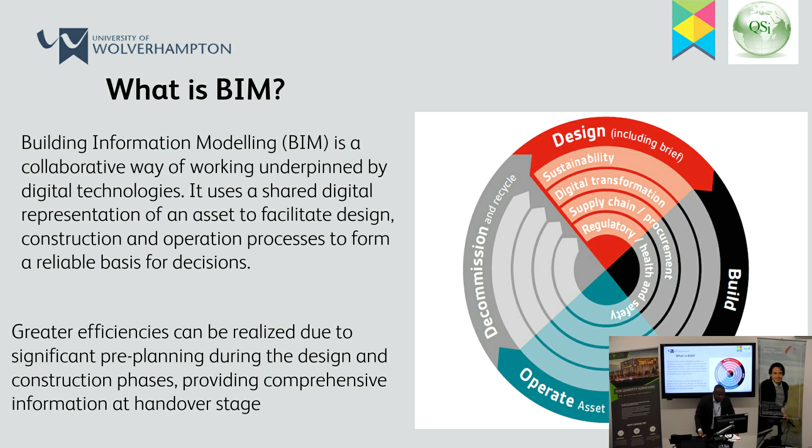So there are standards in BIM as well. A lot of people think BIM is technology. You ask people, oh, we're doing BIM, what are you doing? We're designing in 3D. And they think that is BIM. That is completely different from BIM.

What makes Building Information Modeling what it is, is that it provides a platform where standards, protocols, and processes could be utilized. That's the key thing that informs BIM, while the technological tools are enablers. Software is used to design, to monitor and control projects, to enhance productivity on site during construction. They're all enablers, but the key thing that underpins BIM is the processes, and the core of those processes is the standards.

So if we look at the standards now, pre-2010 there is BS 1192, a standard which deals with collaboration amongst the AEC professions - that is architecture, engineering, and construction. So pre-2010, there is BS 1192:2007 that was there to enhance that collaboration.

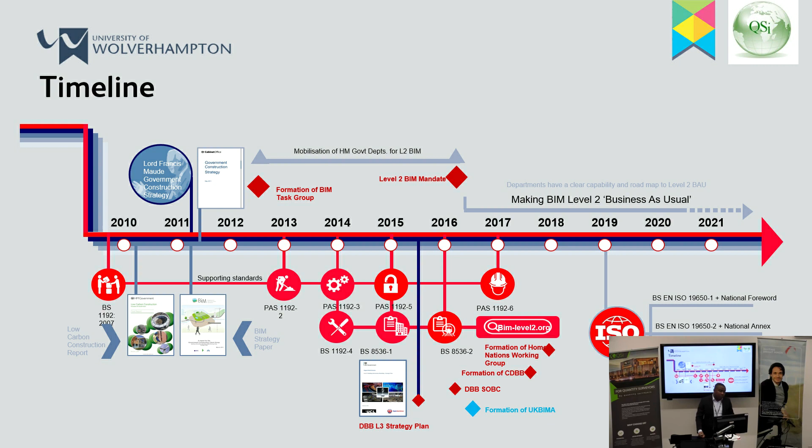So these standards are the underpinning elements that govern the implementation of BIM, or that enhance outputs of different phases in construction projects or other projects as applicable.

This part 1 of ISO 19650 is the national foreword. Part 2 is the standard plus the national foreword - it's an extension of PAS 1192 part 2 into ISO, which also has a national annex. And 19650 part 0 is the guide to BS ISO 19650.

So these are the standards that they use at the moment, not just in the UK - it also extends to other countries. Because of that, some UK-centric terminologies have been updated to accommodate other users in other countries around the globe.

Things like Employer's Information Requirement, which is called EIR - we're going to talk about it a little later - is now called Exchange Information Requirement. Contracts are changed to appointments. So there are different terminologies, different changes to accommodate users in other countries.

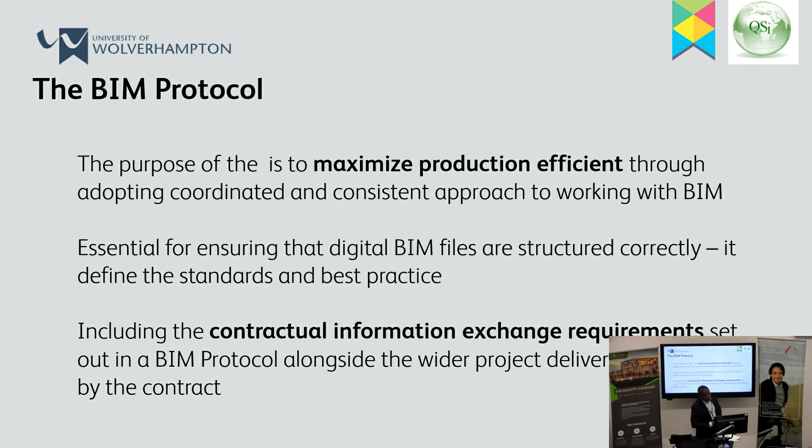Okay, so BIM protocol also supports - if you look at a typical BIM protocol document, you find things like details of BIM information manager and BIM coordinator. You find sections dealing with common data environment, sections dealing with BIM execution plans, sections dealing with levels of model details, that is, level of details as designs progress.

Things like project information model (PIM), and asset information model, model production and delivery table (MPDT). You find all those within the protocol document, and this protocol document is actually very supportive to helping in developing information around BIM implementation, developing information that will support the design and construction, operation and management of that asset, and also ensure that collaboration works very seamless amongst multidisciplinary project parties, if you like.

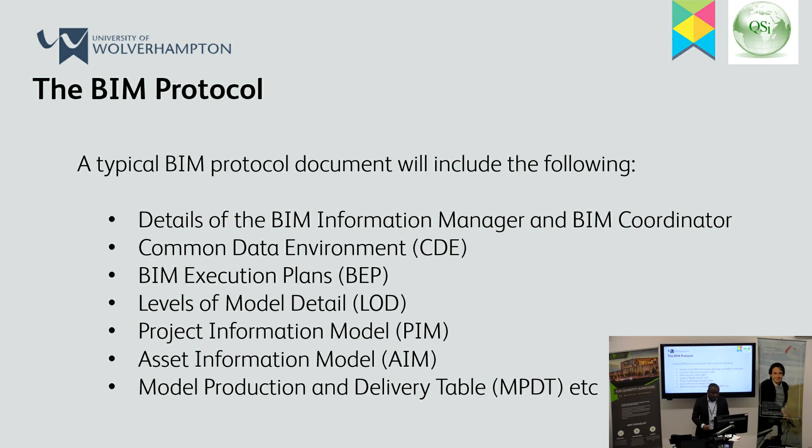So there are guiding principles as well of BIM. You may want to know that BIM is about enhancement or improvement of information management, basically. So it's centric around data management of construction information, right?

So the guiding principles, of course, when you want to deal with BIM, is talking about people, processes, and technology. You have people who understand the processes, and they also implement the technology, which are the enabling tools that's being used.

And this guiding principle deals with how information should be designed, how construction should be built, and how it should be operated to realize the best value, or the best benefit that could come out of a construction process or project, or benefits that could come from this new way of working.

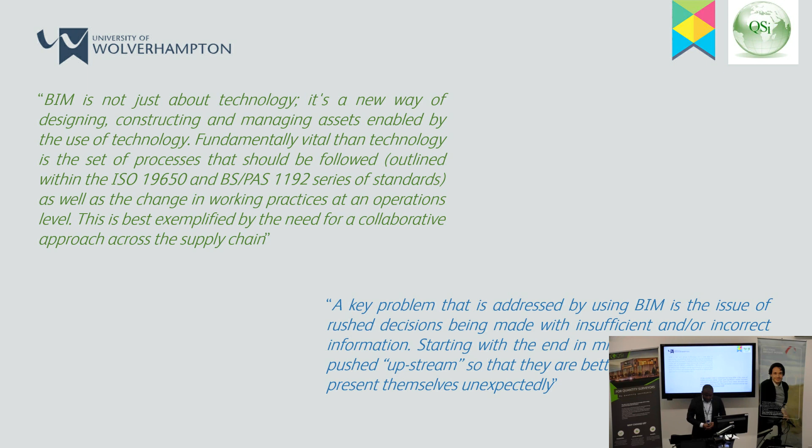So then going over to BIM terminology. We've looked at what the BIM definition is, we've looked at the standards that are there, we've looked at the guiding principles. So let's look at, like I said, I'm just providing a basic overview, knowledge and understanding of what BIM is all about.

And before I forget, there are also levels in BIM where you have level 0, level 1, level 2, and then level 3. Level 0 is just the normal traditional process where things are being designed using drafting skills and hand drawings, majorly drawings, and then cost information is extracted using scale rules, the traditional process of measurement, and the plan of that project or the program that will deliver that project is also done very traditionally.

And then you come to, there's no standard anywhere there, and then you come to level 1 where you have some elements of 2D design and some 3D CAD design as well, to show the geometry or the graphical information of a particular project.

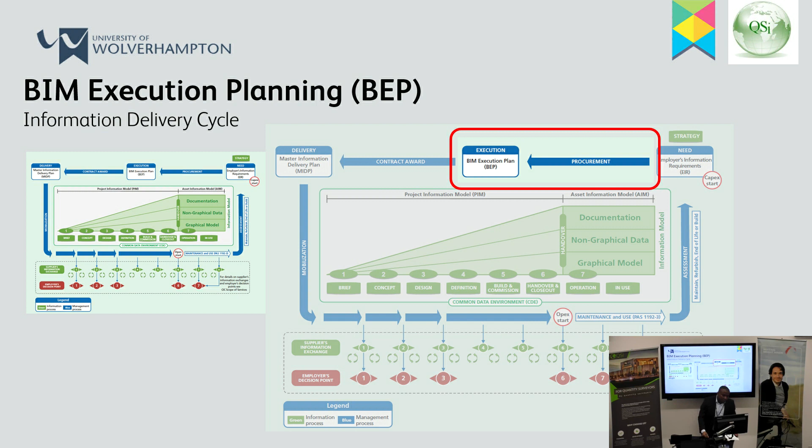Part of the tender documents given to them is the employer's information requirement, and based on that they respond, again depending on the procurement and contractual arrangements agreed. They then respond with the BIM execution plan. After they've evaluated all the tenders, based on the competencies required, considering this is a BIM project, they can decide who to award that contract to. From there, the contractor will begin to produce other documentations like master information delivery plan and task information delivery plan, and so on.

So the purpose of BEP is to facilitate the management of information on the project, including the contractual information exchange requirements set out in the BIM protocol, alongside the wider project deliverables as established by the contract.

BEP, like I mentioned, is prepared by the suppliers who will supply those services and products to the client, and it explains how the information modeling aspect of a project will be carried out. BIM execution plan acts as a digital method statement - just like on a traditional project they always submit a method statement, so BEP acts as a digital method statement setting out the supply chain's agreed approach to BIM implementation on that project.

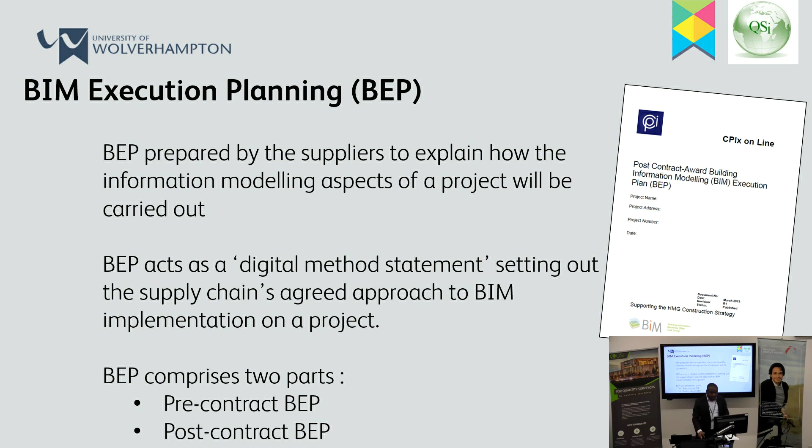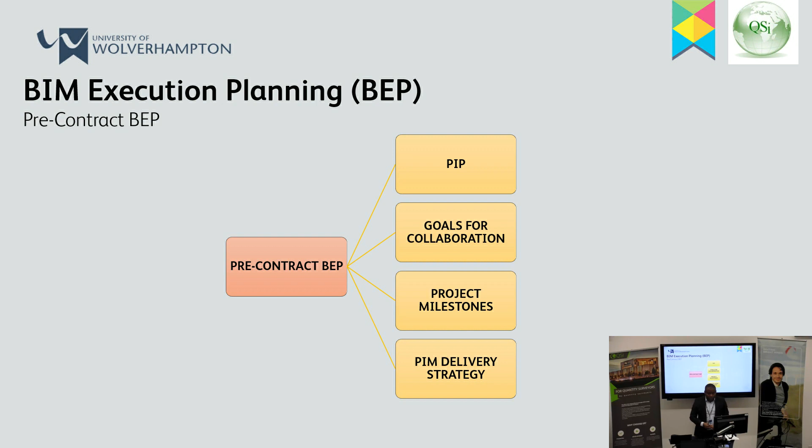There are pre-contract BEP and post-contract BEP. Pre-contract covers project implementation plan, goals for collaboration, project milestones, and project information model delivery strategies. Post-contract BEP deals with management aspects, planning and documentation, standard methods, IT solutions, and all the delivery plans in terms of specific tasks.

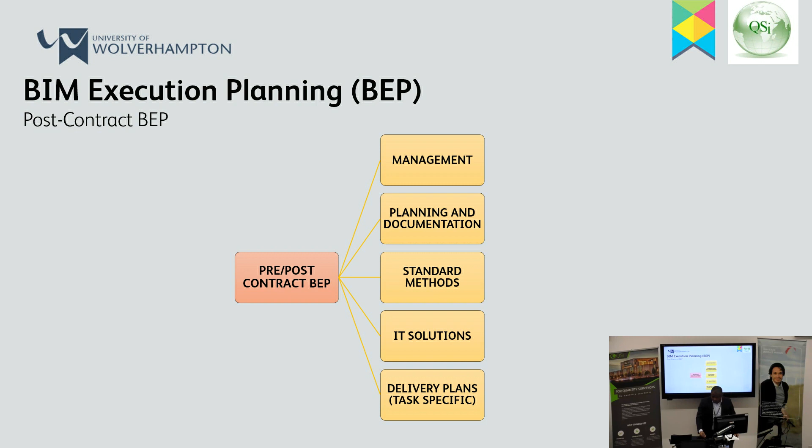Another terminology you find in BIM besides EIR, OIR, AIR would be common data environment. This is very key to collaboration. It's a single source of information for any project that is used to collect, share, manage, and disseminate information, and that information which is shared or disseminated must be approved files.

That information could then be shared amongst a multidisciplinary project team. CDE may use a project server, an extranet, a file-based retrieval system, or other suitable tool sets. Most commonly, they use a project server or a cloud-based system where they dump information - for example, BIM Extra is a common data environment in terms of the software tool, and 4Projects is also a common data tool. In most cases they dump information in the cloud, and every key member of the project team who requires access would always have their login details to that platform to integrate and produce information.

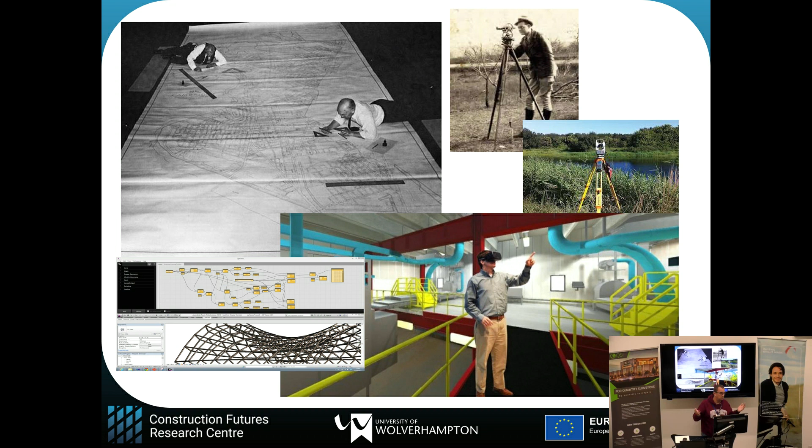So we're going to look at some of these. I wanted to run through some of the things that are happening now, some of the things that are starting to evolve, and some of the things that we're engaged in using. And the first one that kind of excites us around this BIM, in inverted commas, workspace - that's the onset of artificial intelligence and where we're going with that.

And we engage with artificial intelligence every day, we just don't know we are. So when you go onto a website and there's a chat bot, that's not human, that's an AI sitting in the background, and that AI is looking for keywords and then it responds to you. That's one. You know, when we go onto our banking websites and it asks you to select everything with a traffic light in it, you're training Google's AI, ready for driverless cars. That's what we're doing. So we're taking that on as well.

And the subset for us around this is GD, generative design. Massive for us as a construction industry, the applications off the charts for us going forwards. Because what that algorithmically allows us to do is give parameters to a design package and tell it to optimize it, come up with hundreds of ideas. We do it with our architecture students.

Our architecture students could spend hours and hours with bubble diagrams, saying well we want this space to be related to this, and what's the best approach for doing it. Hours and hours. Give those parameters to the machine, it'll generate hundreds of options for us.

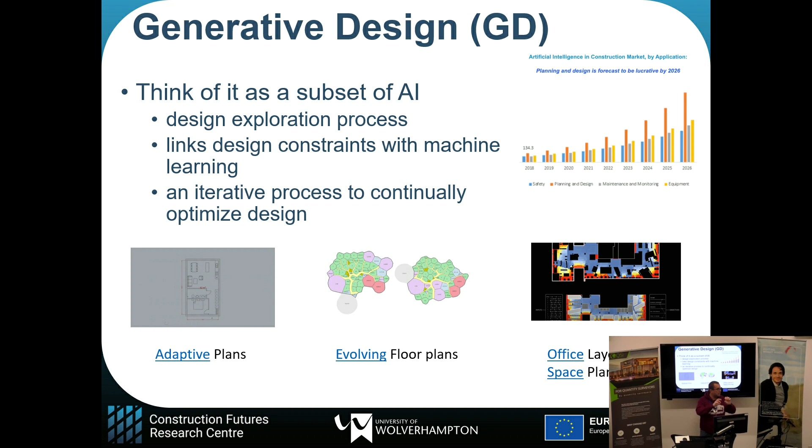And we have it for things like these. These are some examples, we have it for floor plans. You move the boundaries of the floor, it rearranges the furniture, it adapts and it optimizes the positions of the furniture. Some examples of where things could go.

The first time I ever heard of this, I was actually at an Autodesk University conference in the US. First time I ever heard of it. And they told the story of, was it Boeing? I think it was Boeing or Airbus, I can't remember which one it was now. One of the big companies.

And the bulkheads on the aircraft, between like cabin 1, cabin 2, they used generative design. And what they used it for was to optimize the amount of material they used, the amount of metal that went into that bulkhead. Because more metal in that bulkhead equals more weight, more weight equals more fuel, more fuel equals more carbon emissions. That's how it works.

So what they've done is given the same design parameters to the GD algorithm, generative design algorithm, and said to it: keep the same structural integrity, reduce the amount of material. And it had gone through different design cycles and done it. It was crazy, because they kept all the parameters, and they'd reduced the weight of each bulkhead by whatever it was, like 10 kilograms. You multiply that out by every bulkhead on an aircraft, and it reduced the amount of fuel that was used. Then you multiply that by their entire fleet, and they were saving millions upon millions every year in fuel costs just by optimizing the design.

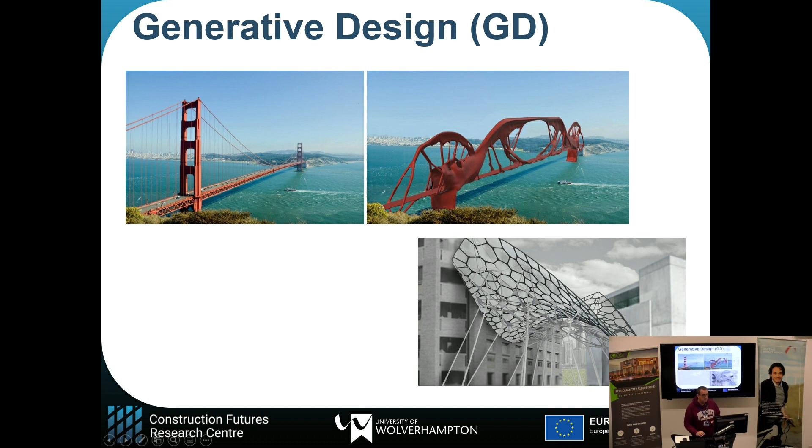And something else that we're really into, and we're doing a lot of work in here, which is really impacting the industry and transforming it, is digital data capture. And it's quite a broad term now.

These are some examples of projects we've worked on. We're able now to capture digital data, capture the geometry, capture the fabric of a building in detail and accuracy that just hasn't been available to us. Measured building surveys - I can go and do that in a few seconds, which may well have taken hours, possibly days beforehand.

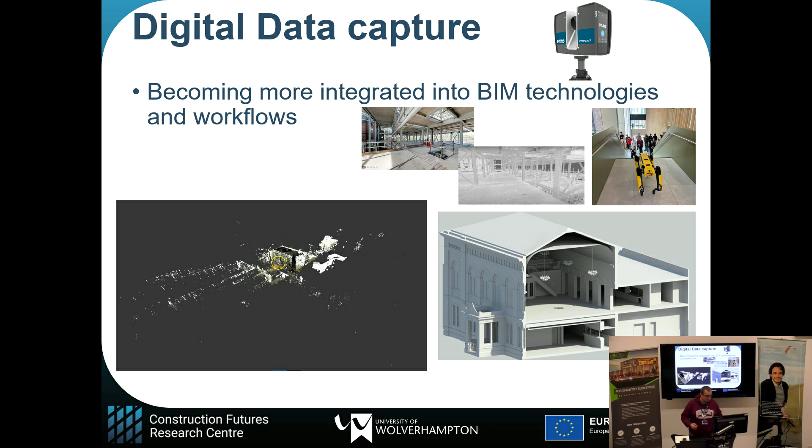So there's issues around it. Not insurmountable, but let's be honest about great technology, but let's also be honest about where some of the issues lie with those technologies as well, because we can't just assume they're a utopian vision that solves all of our problems, because they don't. But very, very cool.

Now with that data capture, the LiDAR technologies with the scanners, they will shoot a laser out. They're built on something called LiDAR, which is a pulse laser - shoots a pulse laser out, hits a surface, rebounds back, measures the distance. That's how it's doing it. But it's doing it about 1 million times a second, or up to 1 million times a second. From that, you generate a point cloud.

And we can put colour on it. The scanners we use have cameras built into them, so it also captures the image as it goes around - a panoramic image. So it's shooting a laser out, whatever it hits it measures, then it also takes a picture of it. It takes from that picture the RGB value, the red, green and blue value, which gives you the colour, and maps that colour value back onto that point as well. So every individual dot now has an X, Y, Z coordinate in space, and also has a colour component. On top of that, it also captures the intensity - great for doing highways or defects in buildings.

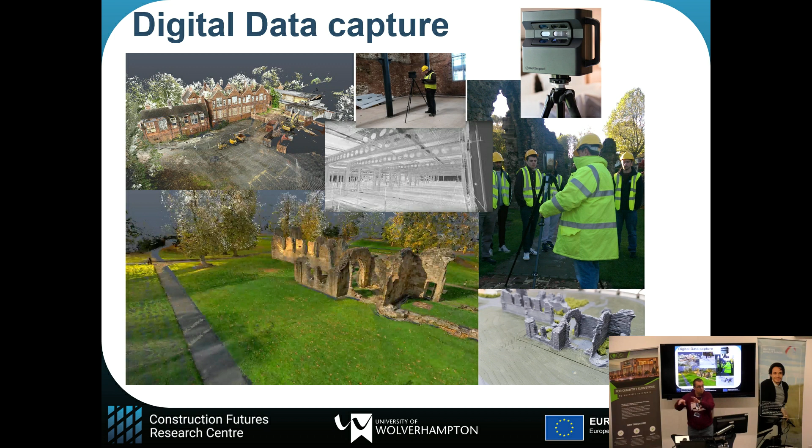With SLAM technologies - SLAM means simultaneous localisation and mapping - you can move, you can walk around with them. We're fortunate here at the university to have both of these technologies available to us now. This one is called NavVis, which makes you look a little bit like a stormtrooper when you're walking around in it, and this one is a Leica BLK2GO. We walk around with them, and as you're walking, they're capturing data.

They're scanning 3D data and also capturing images. In post-production, it's stitching all that together, putting the algorithms behind it, and generating 3D data, a point cloud, for you. Much, much quicker to do it, simpler to do on site - you just walk around site. You look a bit daft walking around with one of them on.

But you can now capture during construction. We always talked about as-built - we've got design, then we talk about capturing data as-built. Now we can capture during build, which means we can monitor more accurately. We've done that project with ISG, who built the building we're in at the moment. We worked with the contractors, captured the data as it was being constructed, and validated the construction work against their 3D BIM to see if it was accurate.

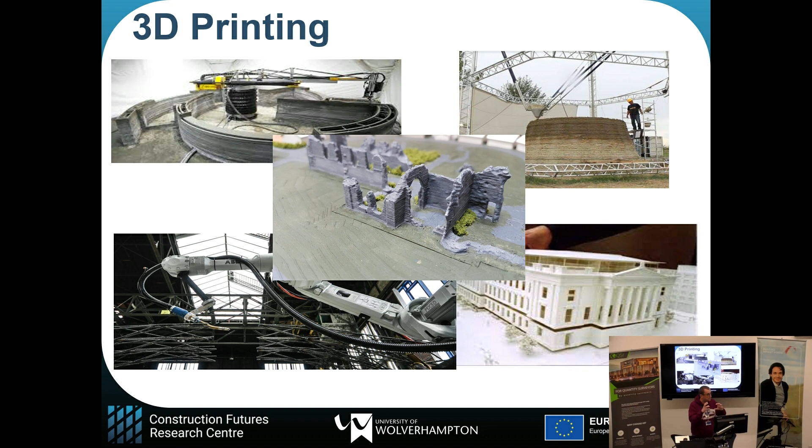We've got a printer here that prints in paper - it just takes sheets of paper like a photocopier and prints in 3D from that. So we're getting there with 3D. That's the 3D model printed out there of the Dudley Priory that you saw earlier - we brought it down, generated the 3D data from it, and printed it out.

Where else do we go? Well, this is kind of our latest addition to the Wolverhampton family, because we're also now into a pretty scary but exciting age of robotics and wearable computers.

People have been looking at robotics for construction for years. You go back to this guy called Leonard Bernold in the US - I met him a couple of times when I was over there - and his specialism was robotics in construction.

Everybody always went to brickwork, because robots in manufacturing do repetitive tasks. You think about what repetitive tasks there are in construction - brickwork is the general one everybody comes back to, so a lot of the focus on robotics went into that. The problem was static robots - you couldn't move them anywhere, or it was a big job to move them.

Now think of a company called Boston Dynamics in the US, which came out of MIT, and they started to develop robots that moved autonomously, and biped robots - human-like robots.

We're talking Terminator level robots, like these. They move and do tasks that we will do. If you kick them and push them off balance, they come back, like we do—they have all that information in them. So from our point of view, now we've got robots that could potentially do tasks that aren't bound by a set working envelope, not just bricklaying. Send them up for high level working, remove the safety risk.

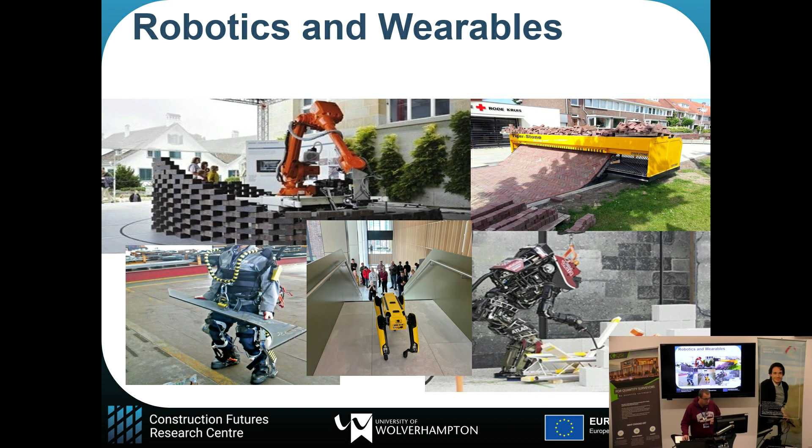From our point of view, this is our latest friend—I'll turn the sound down here at Wolverhampton. This is from Boston Dynamics. We've just taken ownership of Spot the dog, which is not a biped, it's a quadruped. Let's get rid of Paul, we don't want to see him—he's a good looking chap as he is, but we don't want to see him. The dog...

It will walk up and down stairs, walk anywhere, go anywhere. It self-corrects, it self-levels itself. It will avoid objects autonomously by itself. Why are we interested in that? Well, it's kind of cool anyway. But why we're really interested is it can take a payload.

So if we look at Spot here, on the back of it, just at the top there, we can put one of our laser scanners on top. We can send it into a building that's dangerous, that's got asbestos for example, where we don't want to work. We could send it into a nuclear plant, where we only allow so many doses of radiation when we're doing measurements. Those are the issues we can use it for.

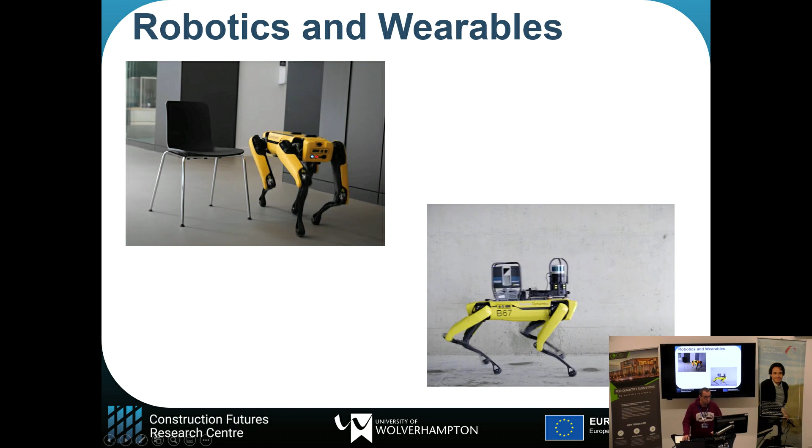So that starts to bring that digital workflow, and that all feeds into the BIM workflow—feeding all that data into places that historically we potentially couldn't have done it with. So Spot, that robotic autonomous robot, you can see the example there with the laser scanner on. That's kind of the next evolution.

Then we get into something we've been engaged with for the last 20-odd years: virtual reality and augmented reality. In the early days, the 1990s into the early 2000s, it was massively expensive stuff. The first reality centre we built in 2001 cost us £250,000—big equipment, very sensitive equipment that we built. Now I can go down to Argos this afternoon and buy a VR headset for £300 and have arguably a better experience.

So I could go down to the high street and buy something. This is a standard graph we tend to use for how people perceive VR and AR in construction. It started off, everybody got very excited, then we got fed up because it was too expensive and didn't really work. Then we really got fed up because we couldn't be bothered with it, and it didn't work in 3D anyway. Then we started to talk about BIM and working in 3D, and now we've got 3D data we can work with.

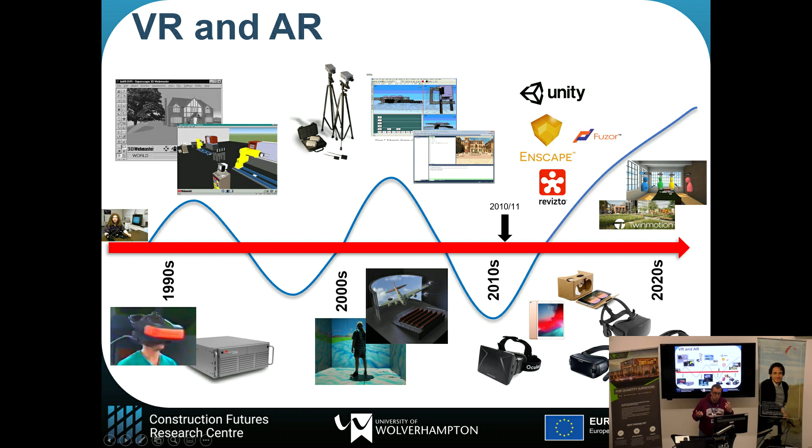Then the cost of the hardware started to drop, arguably because the likes of Zuckerberg and Facebook bought the Oculus brand, which reduced the cost. Then software companies came on stream, like game engine technologies, fitting with the rise in gaming. The software got easier to use, got cheap, even free. It's no longer a toy, it's a serious piece of kit, and we use it. At the university we started with equipment costing £250,000, then came down to about 50 grand, and now we're into kit that's about 4 or 5 grand. So we're changing how we perceive these things.

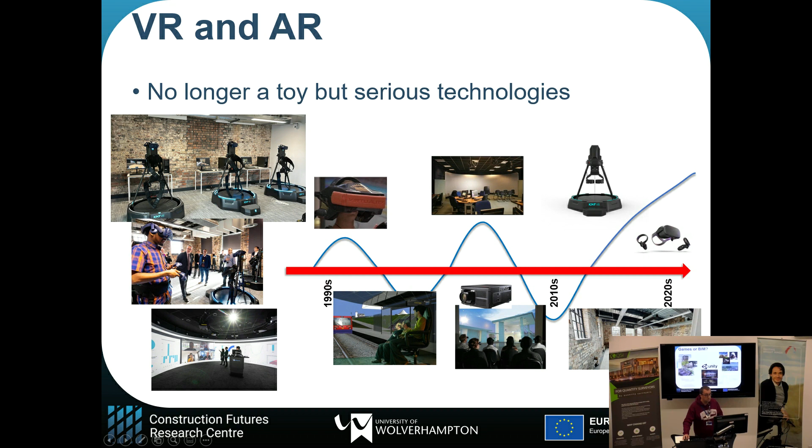Software-wise, we work with a company called Seeable, and Nige, director of that company as well. So there's something to look at.

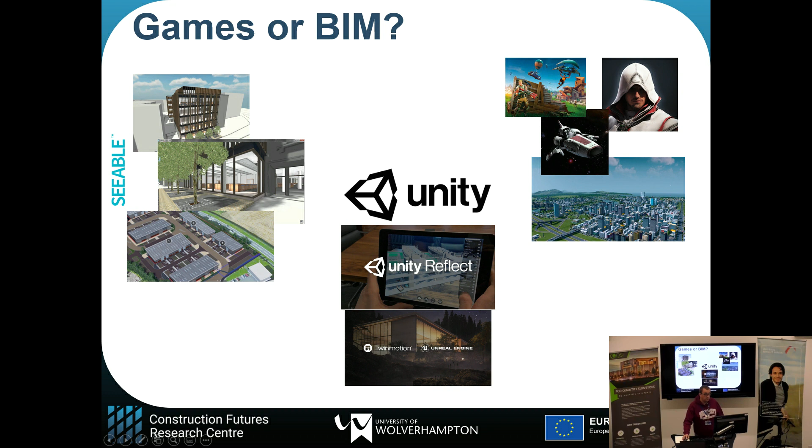AR-wise, augmented reality-wise, that's overlaying it. And just to leave you with a little bit here, because this is new stuff. The National Brownfield Institute across the road from us, we use this on site with the contractor. We walk around the site and we're overlaying the BIM, the 3D model, directly onto the real world. You can see the real world outside there. As we're moving around it, we're able to spot live issues on site, and we track those issues as well. So we're bringing in the digital and the real world.

Pokemon Go, it's Pokemon Go for construction, Pokemon Go times 100,000 - that's where we are with this. And that's kind of a workspace we're still working in. We're working with the company who do that, called Unity, who have that product. They're collaborating with us on some research in that. And that is kind of cool stuff.

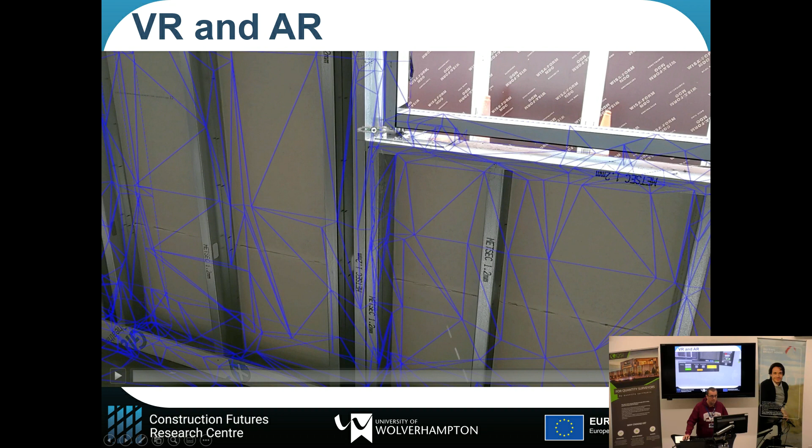Leave you with this one, because this is the thing that everybody's talking about now and nobody really understands, in my opinion - the whole digital twin. We have many discussions around this, because everybody now says they're working with a digital twin, but not really understanding what digital twin is and how it works. Not a new phrase, been around for a long time, but new to us in the construction industry. It's almost like, for me, we got bored of saying BIM, so let's say something new. We say digital twin, but we're not using it in the right context. But something for you to look up and make your own decisions about.

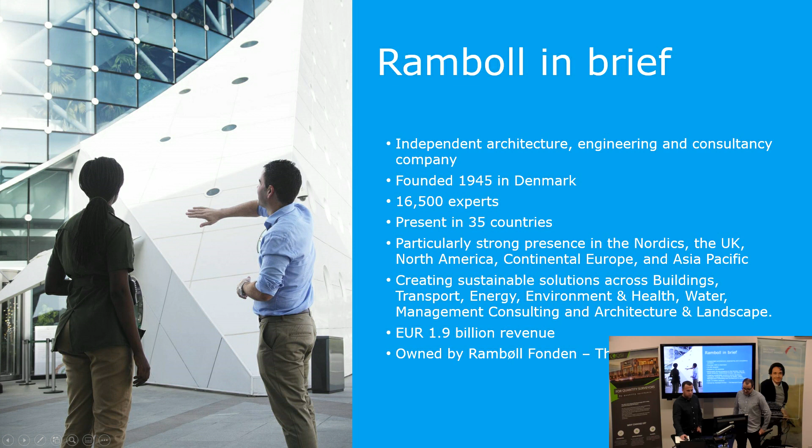Hello everybody in the room and online. My name's Ricky Lindup, I'm a senior engineer at Ramboll. This is David Lowe, who is also a senior engineer at Ramboll. We're going to start by giving a quick introduction to Ramboll. Ramboll are an independent architecture, engineering and consultancy company, a Danish company founded in 1945. Up to 17,000 experts worldwide, present in 35 countries, and we are owned by the Ramboll Foundation. The Ramboll Foundation was formed in 1972 to take ownership of the company and maintain the long-term continuity and provide an inspiring workplace for colleagues. The other 2% of shares are owned by the employees themselves. As I said, we've got a geographical footprint - this is where we are present, really present in Europe, more of a presence in America, presence in Asia, and within the UK we've got 16 offices located across the country.

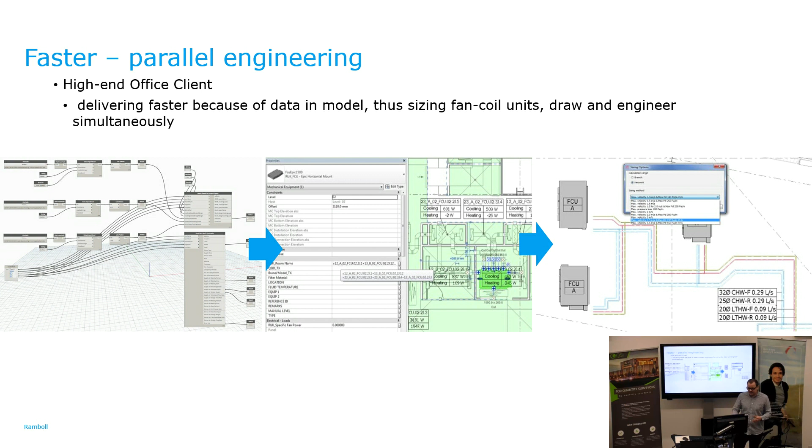This example here is us taking the building fabric from architects in a Revit model, analysing that space, the heating and cooling demands, and automatically putting the right sized heating and cooling terminals in those spaces. Rather than spending a week reviewing an architect's update and manually selecting terminals, it's done more autonomously, so we can spend that time doing other things.

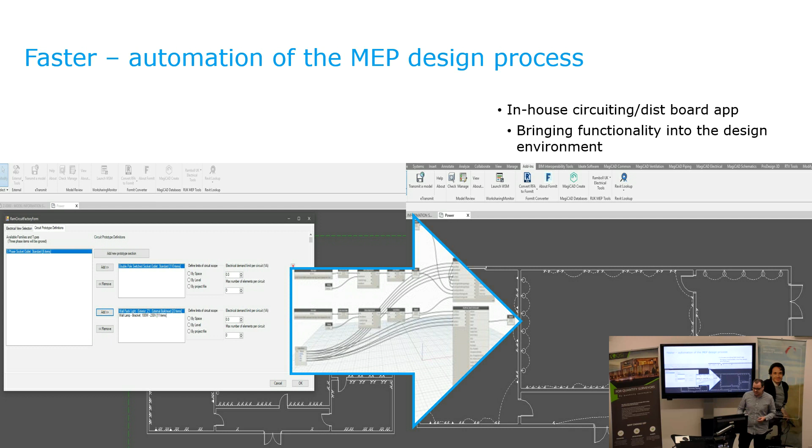Another long process traditionally would be circuiting - looking at the distribution boards. It's really a manual process of circuiting sockets in a space, and you might have a large building with thousands of these to do. Because of the standardised information we get thanks to BIM processes, and sharing that information between architects and engineers, we can automate that circuiting process. It's not putting 3 human beings for 3 weeks on it - it's allowing the technology and hardware already mentioned this morning to be put to good use.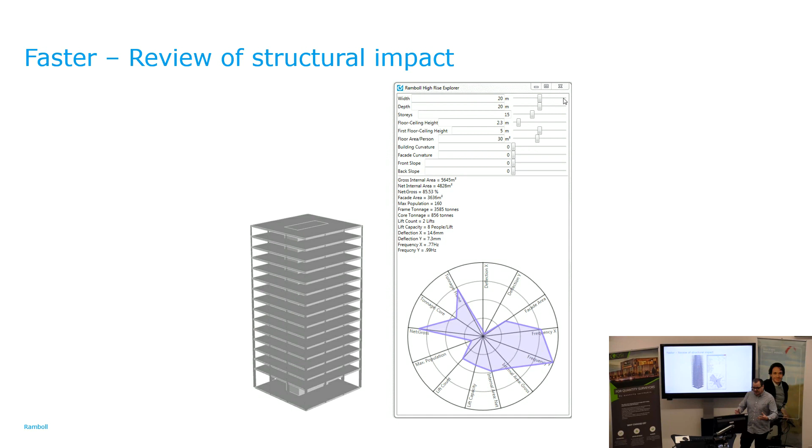It's not just MEP, obviously - structures and civils do a similar thing. This quick demonstration allows us to alter the parameters for the building we're looking at and review what impact that has, nice and visual as well, which is another huge benefit of these workflows. You can immediately communicate with clients and other parts of the design team what the impact of making these changes will be, really early on a project. It's information you previously wouldn't have looked at until late in the design phase, when it's too late to make changes. Now we can review it, look at it, present it, and come out with better solutions faster.

As part of that standardised information sharing with BIM, we can use standardised tools ourselves. We can automate some design processes for drawing pipes and ducts and sizing services - all of that information is in the model, ready to use. We can leverage that information to develop designs quicker and more consistently.

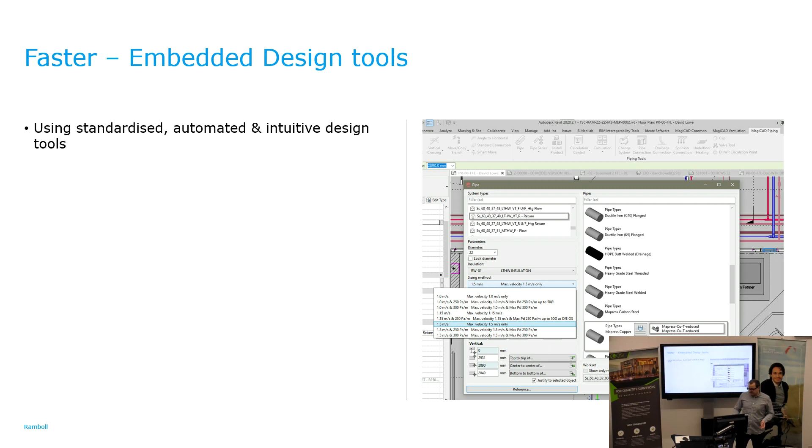On risk, what we like to do is use that information as early as we can. I think Dr. Moses mentioned earlier this morning that using information earlier in the design process improves quality, but it improves risk management as well. Here's something we developed at Ramboll called BEAR - the Building Early Assessment Report. As early as just getting the geometric data of a site or building, we can analyse that, de-risk, advise, and review optioneering really early in the process.

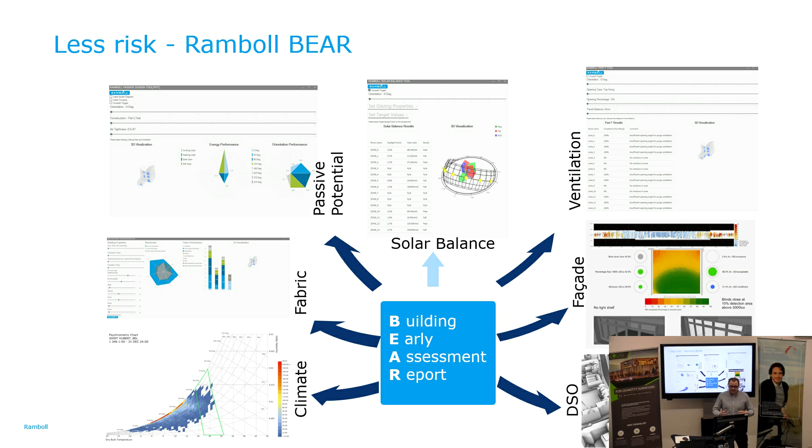So just a couple of the tools we've got here - looking at the climate in detail and the opportunity for passive servicing as early as stage 1 or 2, when all we have is a location and a building form. The DSO tool at the end looks at site massing to optimize daylight, shading and overshadowing, making sure we're meeting design criteria that might previously have had to be met way later. In traditional design we'd have locked-in geometry to analyse, and now we can influence that earlier and improve the quality of the work.

So quality again, you might have had a team of engineers doing paperwork and paper designs in the olden days for sizing and selecting terminals and things like that. You'd have 3 or 4 different people working on it, using 3 or 4 different software tools, and one of them would be writing it down in a schedule at the end. There are so many opportunities there for issues, for human error.

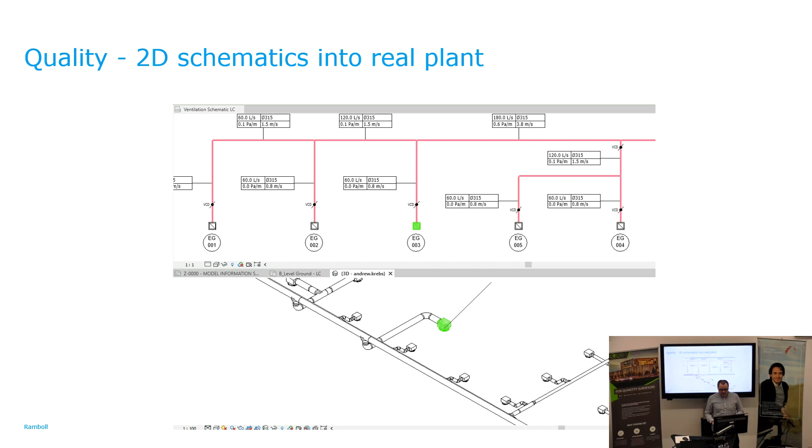So with a common data environment, with the tools that we've got, all of that information can be put into one place and referenced from one place. That means there's reduced opportunity for quality issues. This is all standard workflows that we're using at Ramboll now, standard tools that we have access to, and it's helping us improve the quality of our work.

Electrical, again, just as an example - it's no longer one piece of software looking at the design of cable calcs and another piece of software looking at the design of outlets, and then someone converting that into a drawing on paper or in CAD. It's all in one place now.

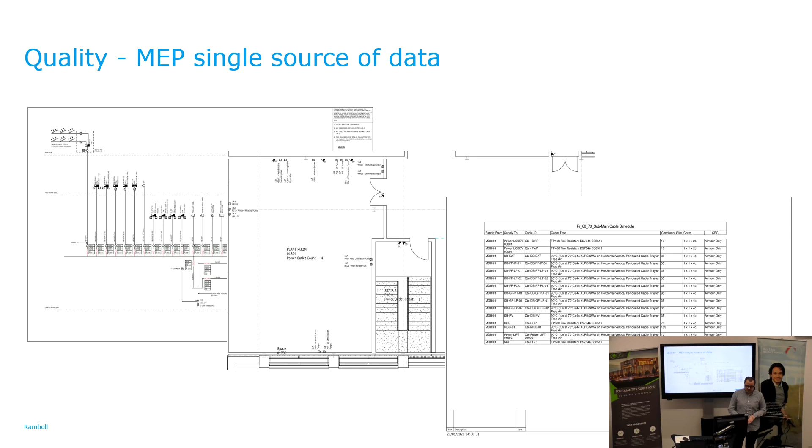We can add that information into the model, use it consistently, and do designs from that information. It means the workflow is less prone to risk, can be updated automatically, can be monitored, measured, and checked.

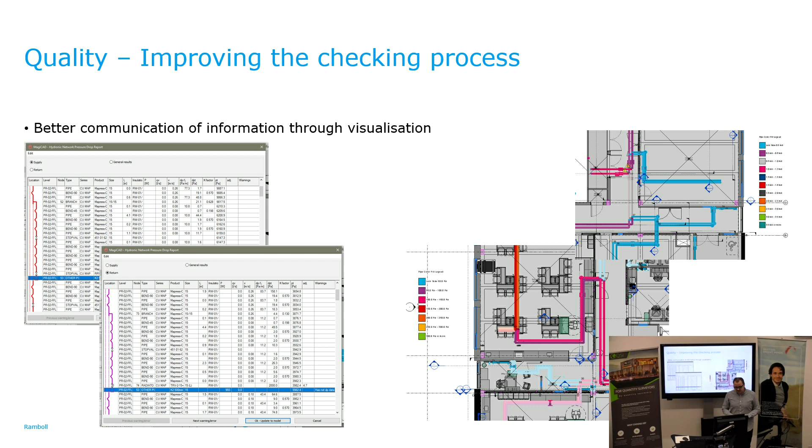That allows us to have our own internal benchmarks when delivering projects. Those benchmarks we can look to ourselves, share them, use them to influence design, and see what's worked well. We can learn from past projects a lot easier with that information to hand, and present it easily as well.

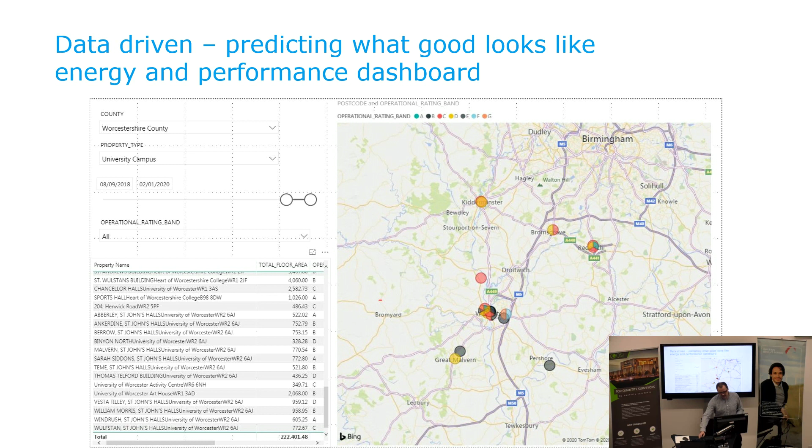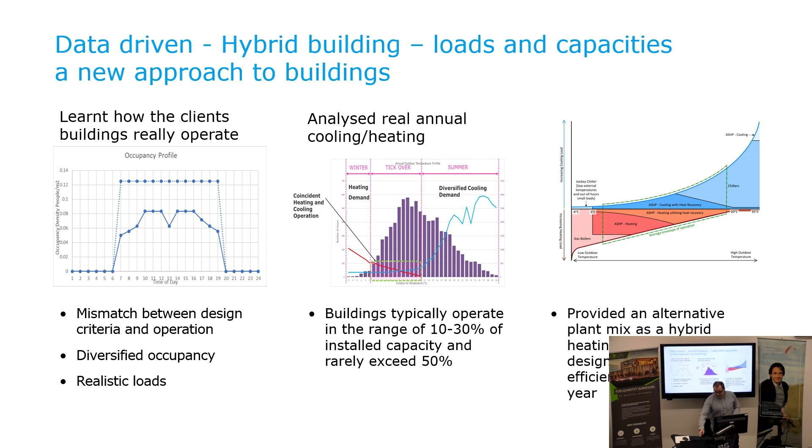Get rid of the rules of thumb we would have used 10 years ago, and we can actually start improving the industry and the quality of projects we work on. That's the same idea - compliant buildings, best practice buildings, and then high performance buildings. You can't get to a high performance building unless you really understand it, unless you get that data and information and use it to influence your design.

If we're talking about low carbon buildings, they need to be efficient buildings, and until we can really understand it and apply that, we're not going to get to where we need to be.

There's a statement there: over 80% of professionals see reduced operating costs as an important benefit. Again, you're not going to get those reduced operating costs, those reduced carbon, by using rules of thumb. You need to use the information, the data that we do have access to now to influence design.

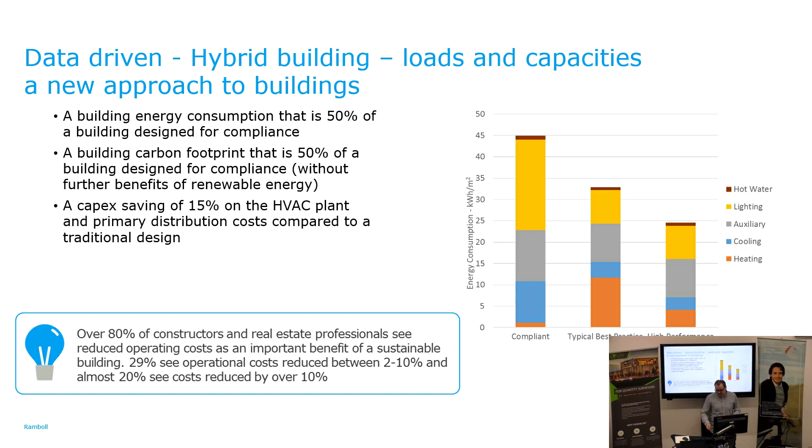So again, there's a few more options that we've looked at here. Really early stages, we have the geometry data, let's use it. We've talked about algorithms as well. We can use these algorithms to optimize buildings to be better performing buildings, to be more effective buildings, to be more cost-effective buildings, improve the user experience in those buildings ultimately.

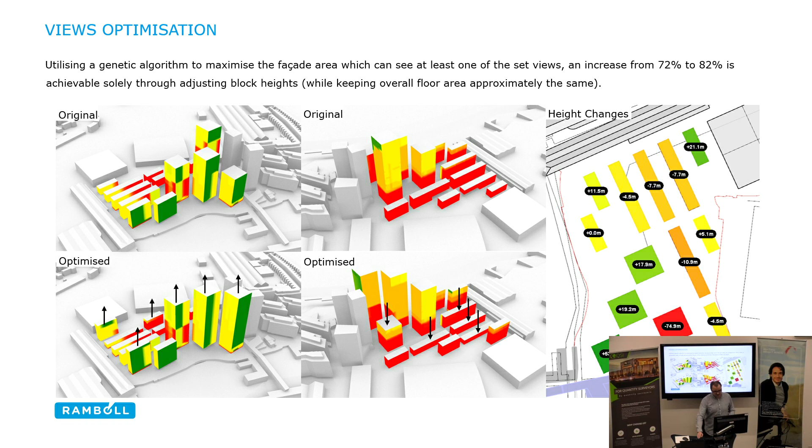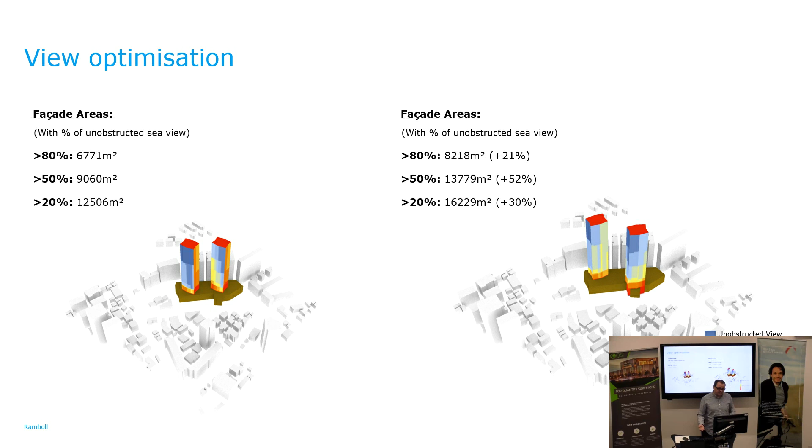So here's just improving views to a certain direction by changing block heights. This isn't changing the floor areas in total, but we're better using the space that we have with a parameter that we can control to achieve a client aspiration of better views, for example. You can see there, it's made a big difference on this project in particular. With a 50% unobstructed sea view, we've improved that by 50%. Just by changing the building orientation slightly and the positioning of those buildings, we've better improved the building itself. Maybe that means that the client has got a better value building, a better quality building.

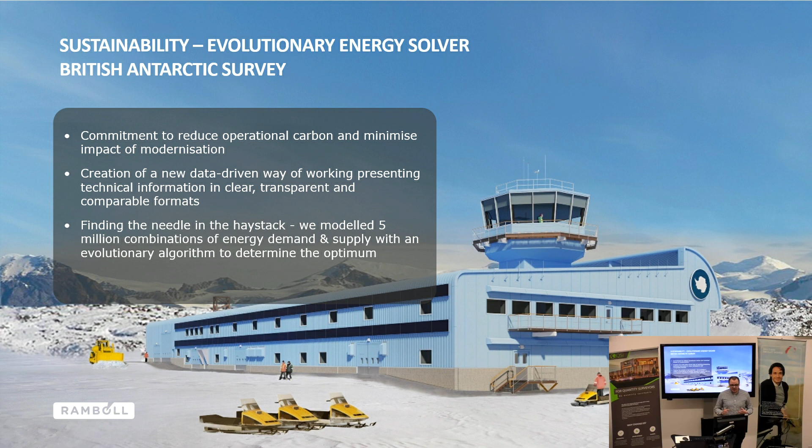Sustainability, I mentioned carbon already, but it's obviously a real focus area for us in the industry going forwards. We were tasked a couple of years ago for British Antarctic Survey to look at how their new stations in Rothera and the Antarctic could be optimised, how we would service that. What we were able to do is a data-driven approach to review a great deal of options, as we've touched on already, with genetic algorithms, so that we could optimise that building, optimise the limitations that we knew we had to work around.

So if you're in Rothera, you have to get a ship to get fuel. So how much fuel do you want? When do you want it? Do you build diesel engines, CHPs, gas boilers? How do you optimise that with the limitations that you know that you have in that building?

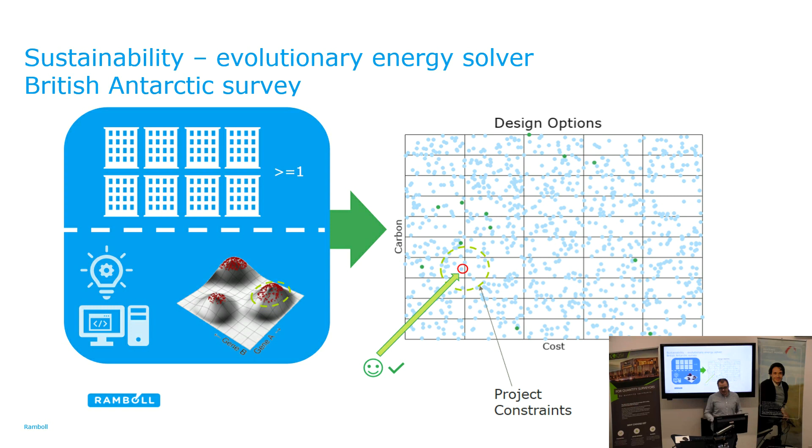So again, this is another sort of key client that we're working for. They've got existing office stock, and they want to know how to improve those buildings and how to get them closer to their net zero carbon targets that they've got.

So we created a dynamic model. We did some site surveys, we looked at meter data, we calibrated that meter data then against what we would analyse so that we could get in our analysis a really close match to what their real life actual use is.

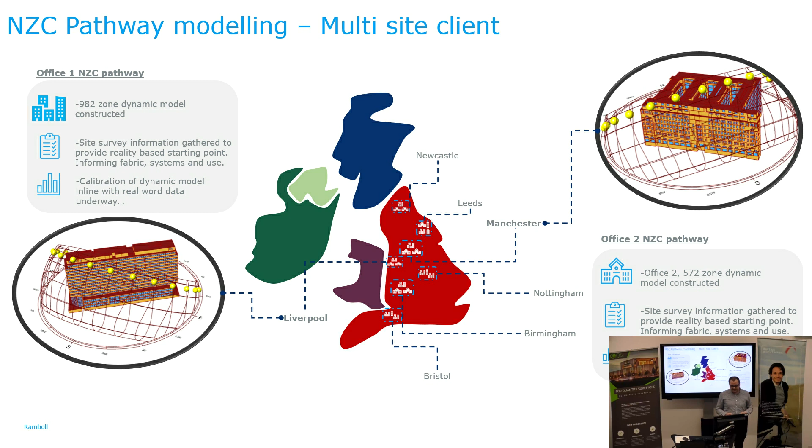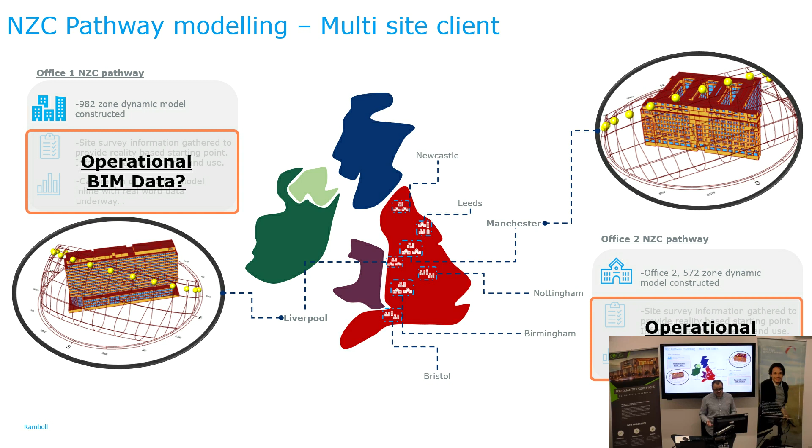But going forwards, we wouldn't need to do that if it was a fully BIM enabled process. If they already have that operational data there, if they already have that meter data, that usage data, if that's in their in-use BIM process, we'd have access to that. We could improve the building stock then, review options for how to improve each one of those more autonomously and more accurately than we otherwise could do.

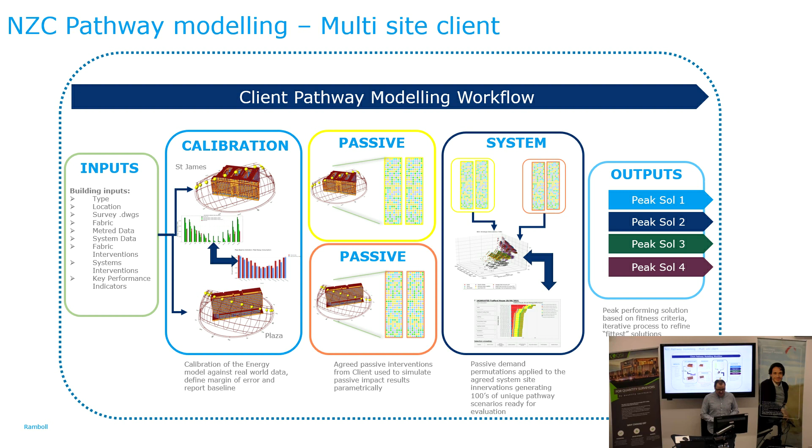But this is the process we did without that data, relying on the metadata and our own engineering knowledge as well. You can see each one of those dots again is a different study for best fitness. You see how many there are, and you wouldn't be able to do that without these digital tools. We're able to use this information to improve the sustainability of each of these buildings, each of these projects, so that we can better meet the future requirements for net zero carbon and low carbon operating buildings.

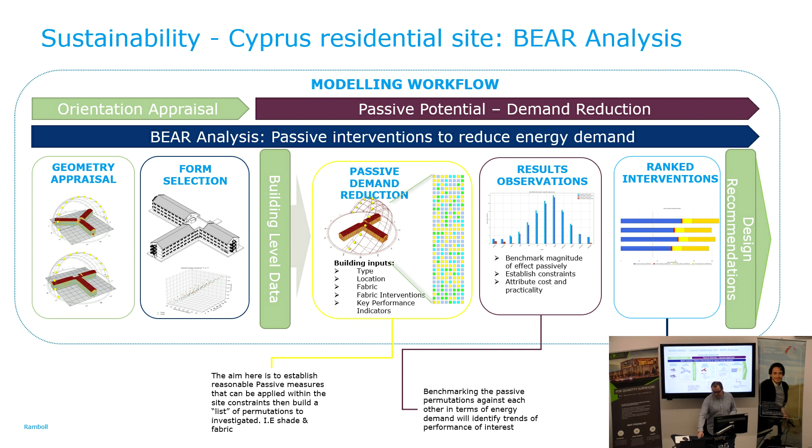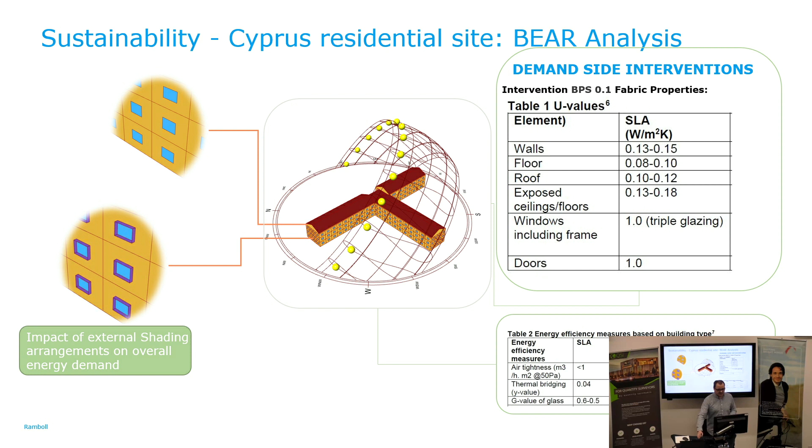So another one, residential in Cyprus. You see each of those parameters that we have access to, each of that information, we can then plug that back in and analyse that and review it with genetic algorithms.

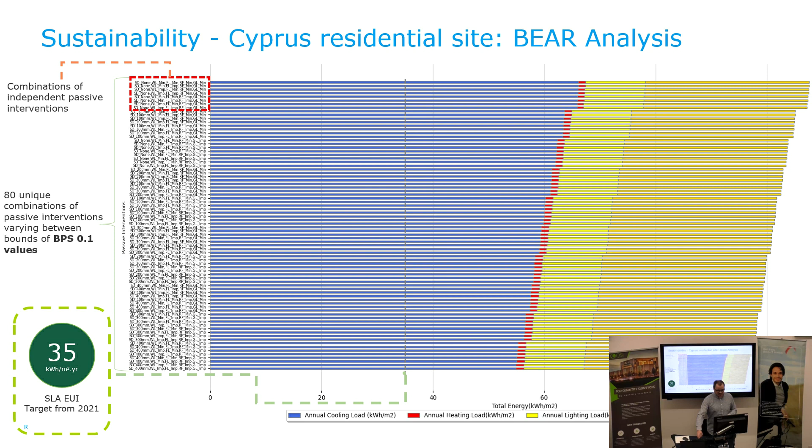That's all of the studies that we've done, and you can see the combinations of passive interventions at the top that have come out with the best results. So, thank you for that. I'll pass you over to Ricky to go through more detailed analysis, a more detailed case study.

Well, I'm going to talk to you about RamView. It's similar to what Dr. David discussed earlier, the VR suites, point cloud surveys. Ramboll have just called it RamView as a branding exercise. So what is RamView? It's like, in simple terms, Google Street View or Pokemon Go, as Dr. David described it.

It allows a client and project team to view and interact with reality capture data, so point clouds, 360 camera images, BIM models, and engineering simulation results, in one location. It allows instant comparisons to be made from anywhere between existing assets, new building designs, and the progress of different teams and disciplines during construction.

Another key aspect of this is it avoids costly site visits. I'm working on a project in Sweden, which I'll discuss more later, and obviously 900 miles away, it's not an easy place to go back to. So RamView has been integral to the success of that project.

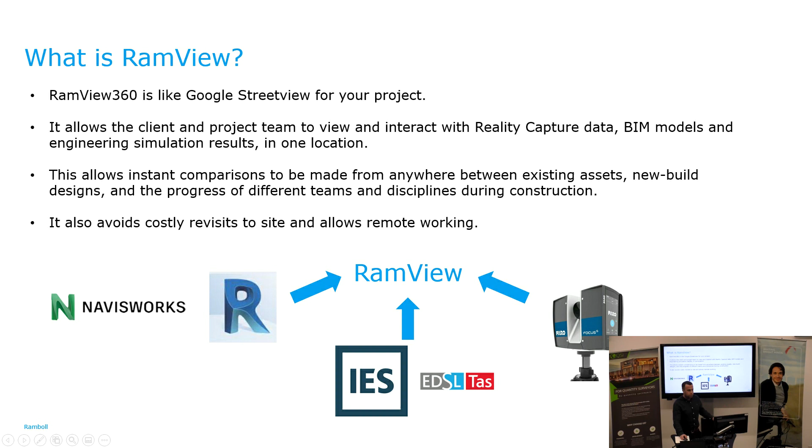RamView is almost like a central hosting platform. We've got the 3D Navisworks and Revit models, which can be loaded in. We've got the analysis results from IES, which is a thermal modelling software, and Tas, and we've also got the point cloud data, which can be put in.

So we've used RamView on HMS Warrior, Portsmouth Historic Dockyard. This is a tourist facility, so regular site visits weren't appropriate. A point cloud survey helped the design teams get around that.

Lawrence Hall, so that's what it looks like in reality. That's the point cloud survey, and this blue is a CFD analysis which has been loaded in, which I'll hopefully show you later. Then the Mary Rose, Portsmouth Historic Dockyard, because of the nature of conservation of the Mary Rose, we weren't able to do many site visits. So again, a point cloud survey was integral to the success of this project.

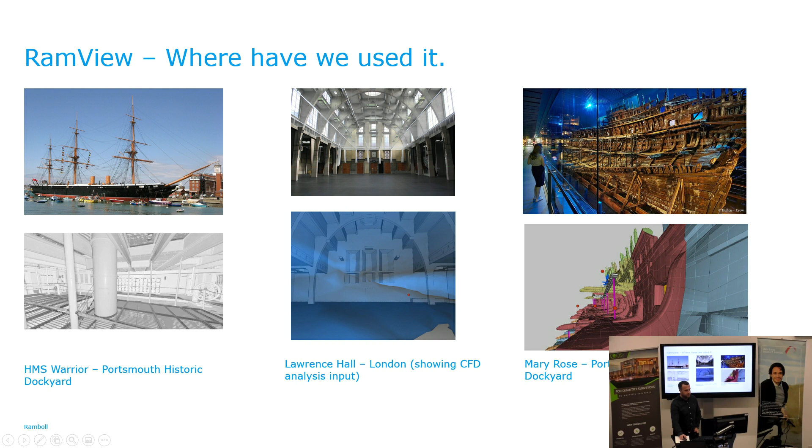So, Avicii Arena. What is Avicii Arena? It was built in 1989 to provide a new multi-purpose arena in Stockholm. It has a seated capacity of 13,850 for ice hockey, and a capacity of 16,000 for concert performances. It's actually hosted the Eurovision Song Contest twice, in 2000 and 2016, and at the moment it is the largest spherical building in the world.

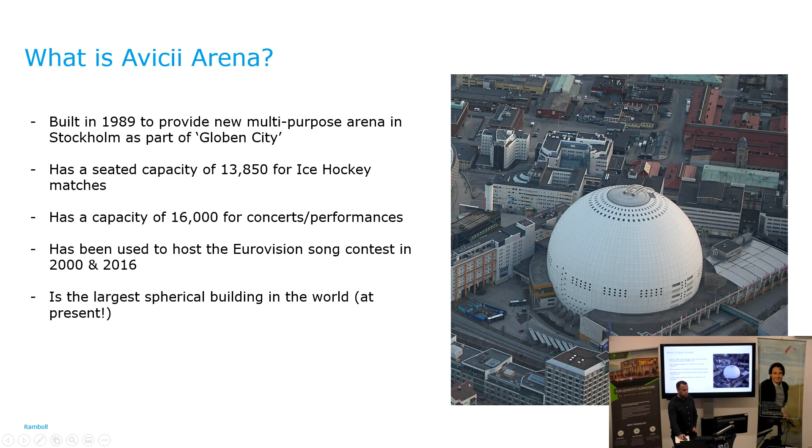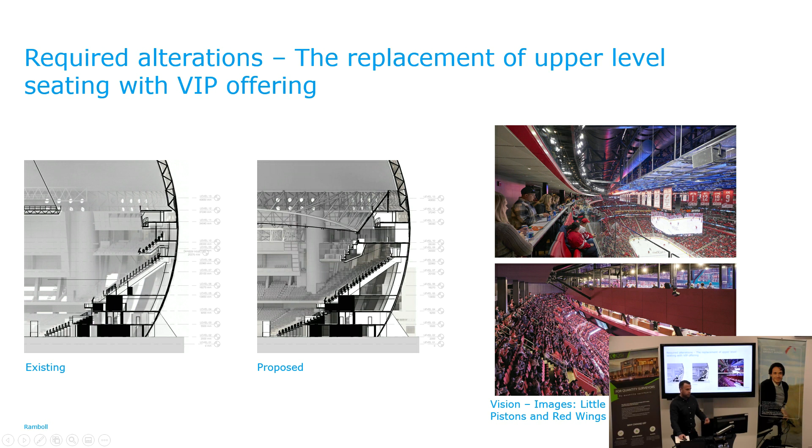So this is the Little Caesars Arena in Detroit. It's more of a premium VIP package, just to get Tier C back in use, and also so the Avicii Arena can offer premium seats.

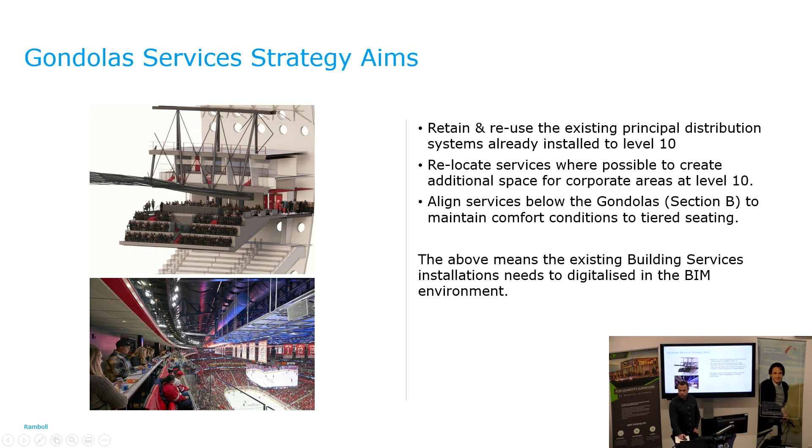So this is an architecture render. Some key client aspirations were for us to retain and reuse existing principal building service installations, and only relocate services where the structure required for the new gondolas and acoustic ceiling - which I'll come on to in a little while - are being put in, and align services below the gondolas, the skyboxes, which I'll show an image of later on. So the above means existing building services installations need to be digitalised in the BIM environment, and RamView was integral to the success of that.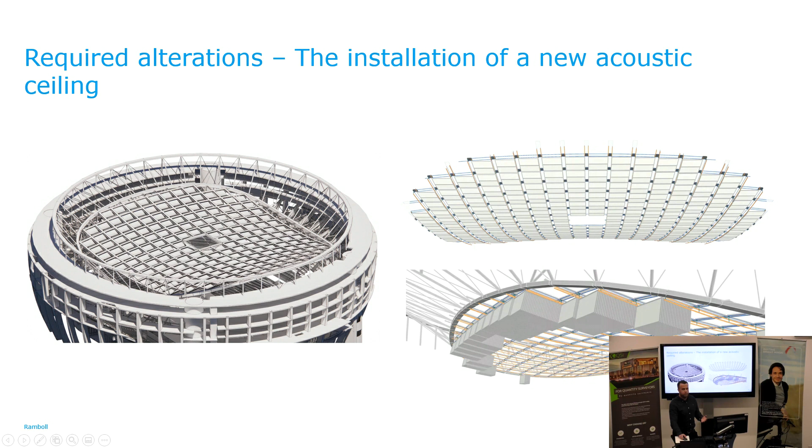Another required alteration: the acoustical performance within the Avicii Arena, particularly when there were ice hockey matches on, was not good. So we've had an acoustician design a retractable acoustic ceiling in the shape of a Pringle, and as you can see, each one of these is a new structure which will connect to a column, which will affect the building services installation - which is why digitalising the existing building service installation in a 3D format was important.

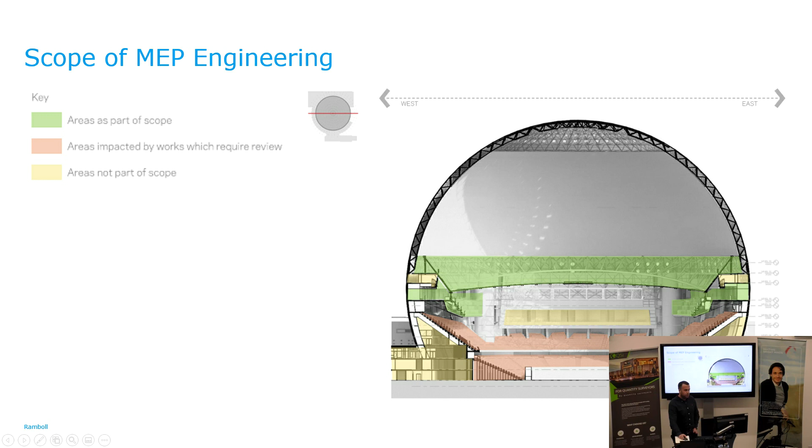So these are the scope of MEP engineering services. Green is areas part of the scope, orange is areas impacted by works which require review, and yellow is areas not part of the scope. This is actually an image from RamView - we use 360 cameras, and a point cloud survey. This is the MEP ring at level 12, where the main MEP distribution was. The MEP digitalisation workflow was to use existing record 2D information.

This was 2D scans of drawings from 1989. We don't know how accurate they were, but that's all we had to go off.

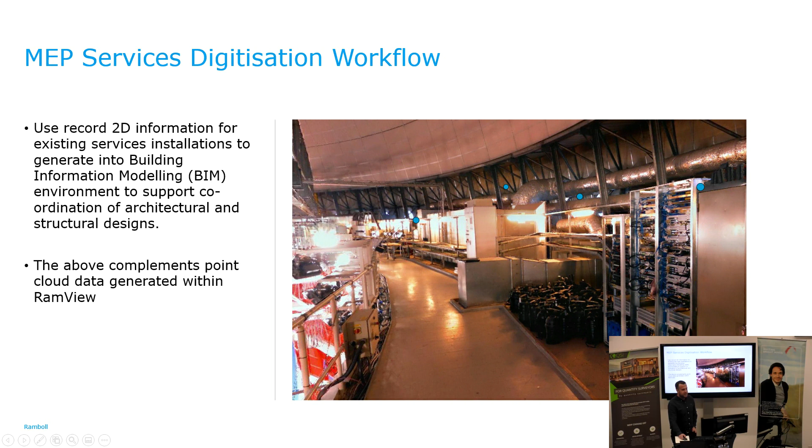RamView complements the 2D information in order to get an accurate picture of what is already there. So this is an image from RamView. Each one of these blue dots corresponds to a camera position, and it complements the existing 2D record information.

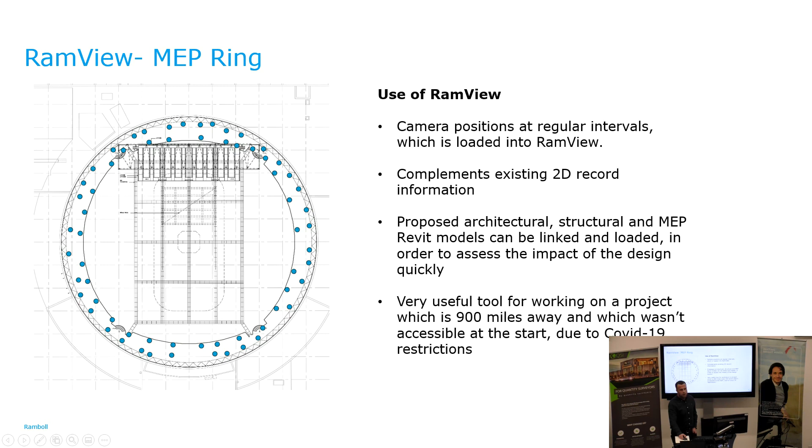Proposed architectural, structural and MEP Revit models can be linked and loaded in order to assess the impact of the design quickly and early. It was a very useful tool for working on a project 900 miles away from Birmingham, and at the start of the project, site visits weren't possible because of COVID-19 restrictions.

So this is an image - this is a camera scan, and also the structure required to hold up the acoustic ceiling. As you can see, the new column does actually clash with the existing services. So it's a very quick tool for us to sit down with the structural engineers on a Teams call, or in person, and say the column clashes with our building services design.

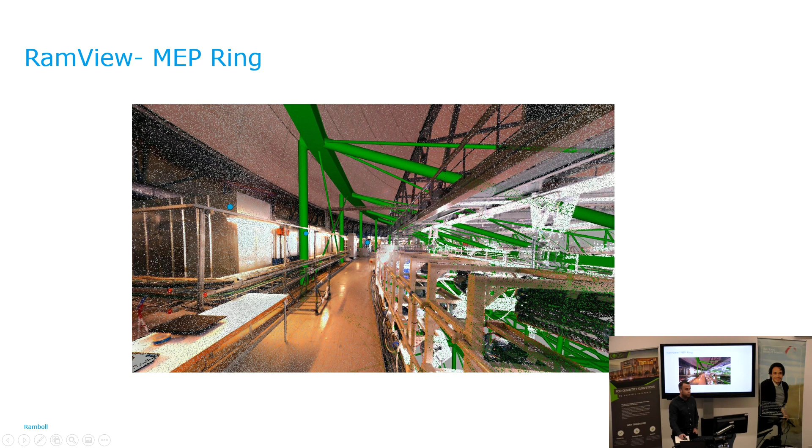Is there anything we can do to the structure to avoid this, or do we need to modify the existing services to avoid this? Again, another image - as you can see, more clashes. The access to the existing ductwork and cable containment is also affected.

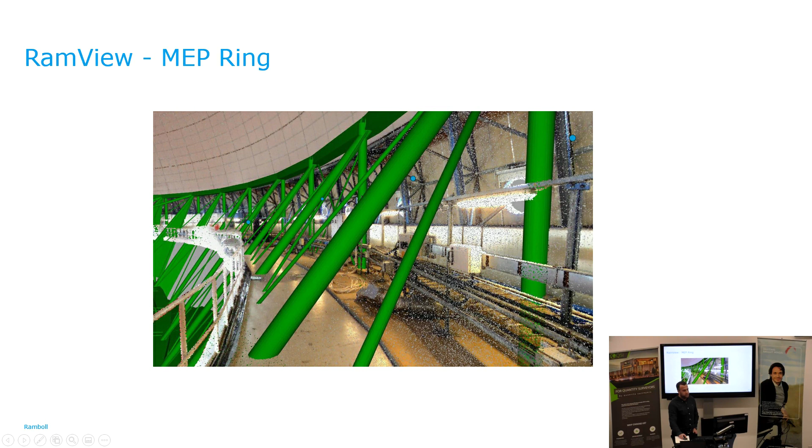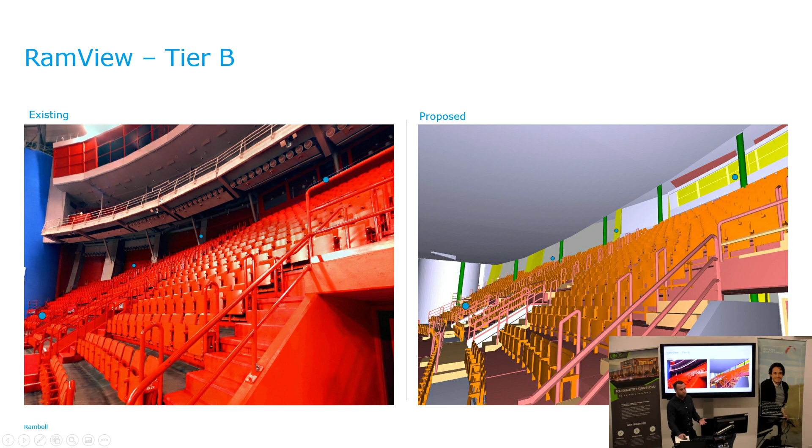And this is tier B. This is the existing ventilation installation, and this is a RamView with the new structure put in. As you can see, tier C has been demolished, but we're replacing it with the skyboxes, and the skyboxes will actually block all of these ventilation services. So we need to reroute and repurpose this air in order to provide a comfortable environment for the people sitting at tier B.

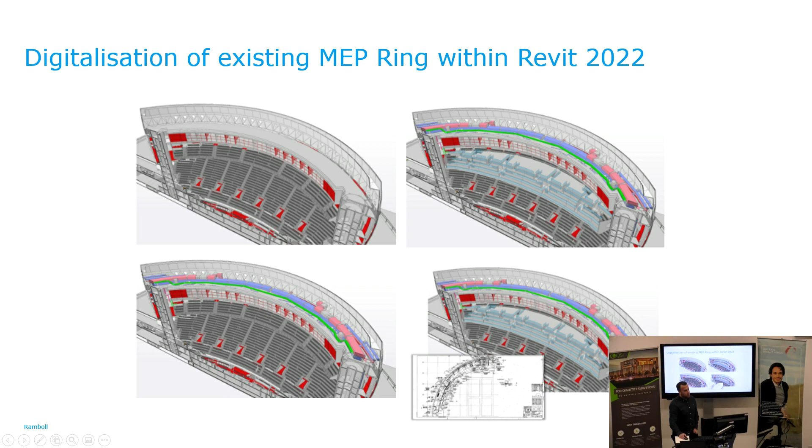RamView allows you to measure, so we could look at the 2D information, and if something wasn't clear we could get on RamView and just make sure that what we were looking at is what we thought. So the evolution is, we started off with nothing - and yes, this is each quarter, since it's obviously a circular building. So we developed the existing installation at high level in order to assist with the design.

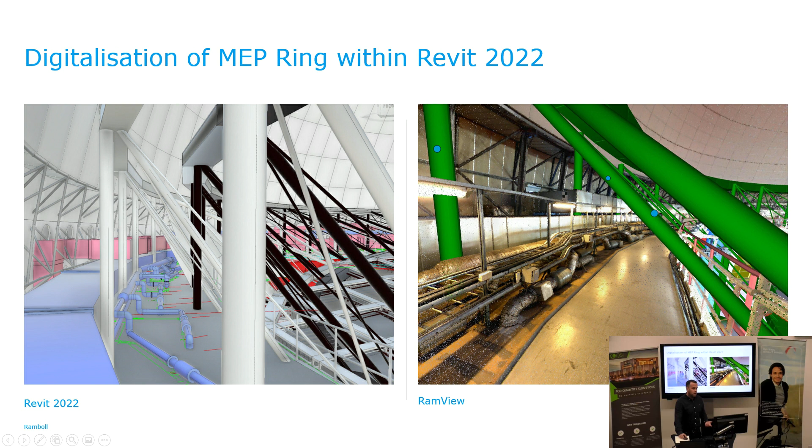So this is an image from RamView - as I said earlier, this is a structural model loaded in with the clashes to the existing services, and this is Revit 2022, which our technicians developed using the 2D images and also RamView. I'm just going to run through a few examples of RamView.